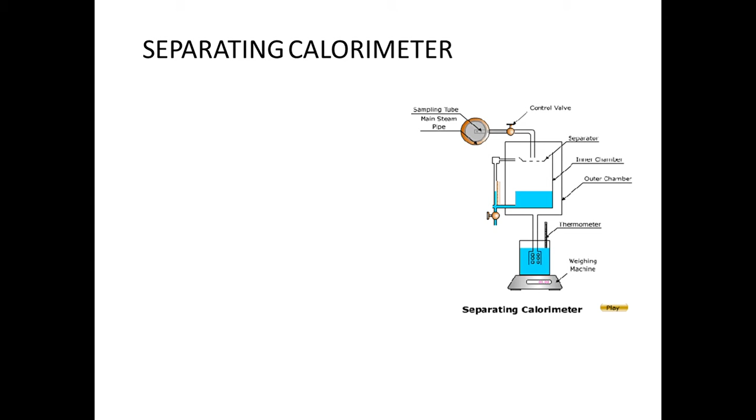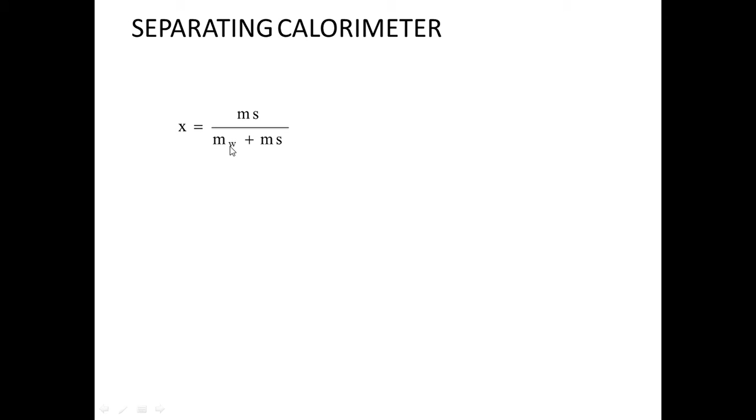So see here, mass of water separated is there and mass of steam is there. So simply think that you can use the equation Ms divided by Mw plus Ms, where Ms is the mass of steam which is condensed and Mw is the mass of water separated. So with an easy formula you can find it out. But the issue is that we are considering that the mechanical separator is there. This mechanical separator is not going to separate the complete moisture. That is the difficulty. So due to which we can't have accurate readings of Ms or Mw.

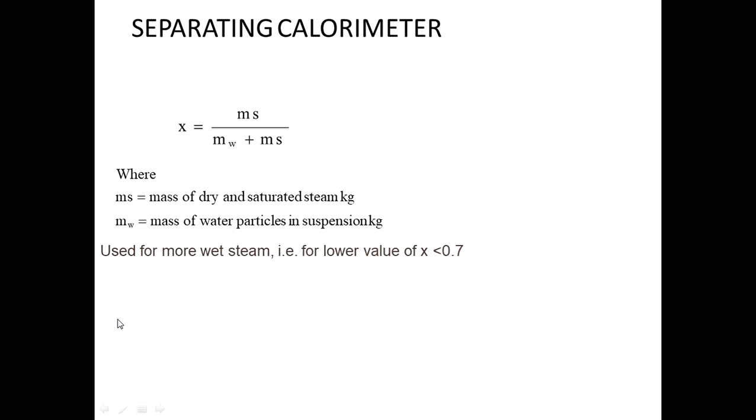The value of Ms which is coming will be more, because we are not going to separate out the complete moisture. So that's why Ms will be more, meaning whatever the measurement of X is, that will be more than actual. So this type of calorimeter is used for prediction of the dryness fraction when the steam is too wet, or you can say the moisture content is more, or the dryness fraction is lower. So this type of calorimeter is used for more wet steam, or you can say lower dryness fraction.

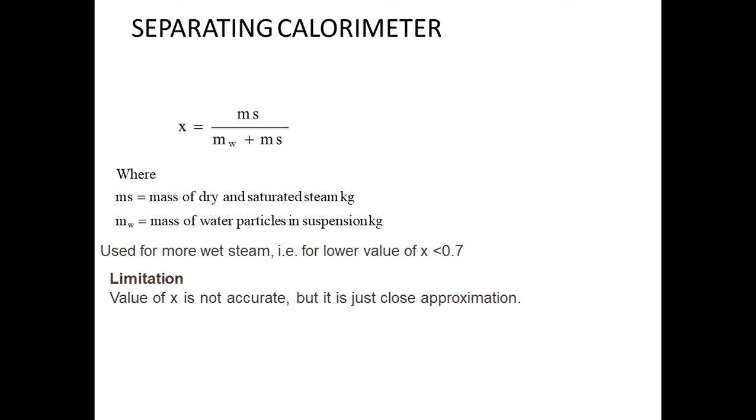So this is a limitation, and we can say that it is not that much accurate, because the separation of moisture content is not perfect in this case. So that is the second, the separating calorimeter. Now the third is the throttling type calorimeter.

In the throttling type calorimeter, as I have said, we have to use the throttling valve. Okay, so the throttling valve is nothing but a restricted area through which you pass the steam and it gets expanded. Expansion of the steam means what? The pressure is going to reduce. So initially pressure will be higher and that is reduced during the throttling process. And we will measure the pressure before throttling, pressure after throttling, and temperature after throttling.

Only thing is that when the steam is throttled, you can measure the mass again by passing it through the condenser in which the cooling water is circulated, and you will get the mass of the steam also. So likewise the throttling calorimeter can be used. So this is a simple structure we are having. We require three readings majorly: pressure before throttling, pressure after throttling, and temperature after throttling.

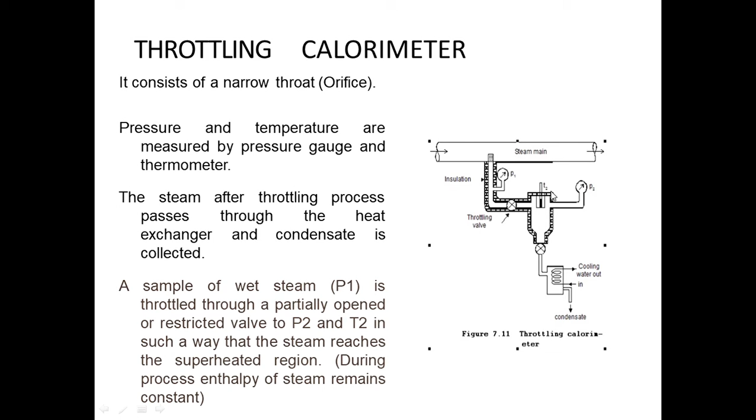So with this we can use the throttling process, and in the throttling process we are considering that it is an isenthalpic process in which the enthalpy before throttling and enthalpy after throttling remains constant. So for finding out H1, we know wet steam is there, we are sending the wet steam. So we can use the formula for wet steam, that is HF plus X HFG for H1. But for H2 we can see that if we throttle this, the pressure is going to reduce, but it is an isenthalpic process.

We can consider that the steam gets superheated. Okay, so it is superheated, it goes to the superheated region. So you can calculate H2 from the superheated steam table or by the calculations. So I have written here, H1 you can calculate like this, while H2 you can calculate as Hg2 plus Cp of steam times (T superheated minus T saturated).

So for these calculations, how many readings do you require? You require the pressure P1 for calculation of H1, you require pressure P2 for calculation of H2, and the temperature T2, which we can call T superheated. So likewise, you can find out the value of dryness fraction X1. See, in this relation, X1 is the only unknown, so you can find it out easily.

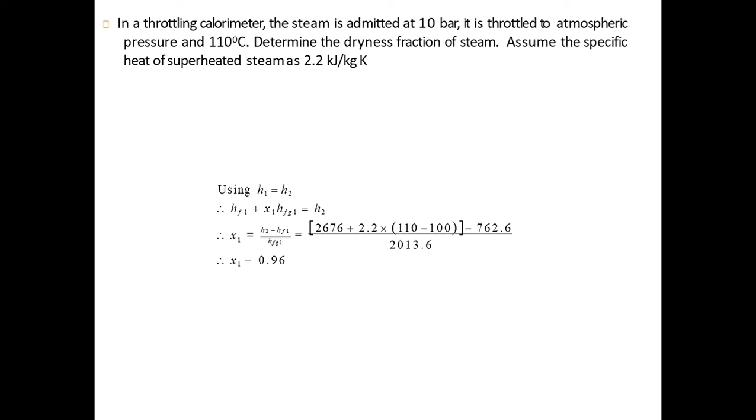But it is possible only when the dryness fraction of the steam which we want to measure is more. If it is lesser, then we can't measure it through this method. So that is the limitation. So if the steam is too wet, the resultant dryness fraction X cannot be accurately measured. If you use it only for higher dryness fractions, that is when the dryness fraction is more than 0.85, then this type of throttling calorimeter is useful. Okay, so with this you can also solve the problem that we discussed in the last lecture.

Now, see, the drawback of the separating calorimeter is that it cannot be used for higher dryness fractions. It is used only for lower dryness fractions, because for higher dryness fractions the separation of the steam may not be that accurate. So accuracy is reduced if you go for higher dryness fractions with the separating calorimeter. Okay, while the throttling calorimeter cannot be used for lower dryness fractions. So you can't use the throttling calorimeter for the lower dryness fraction.